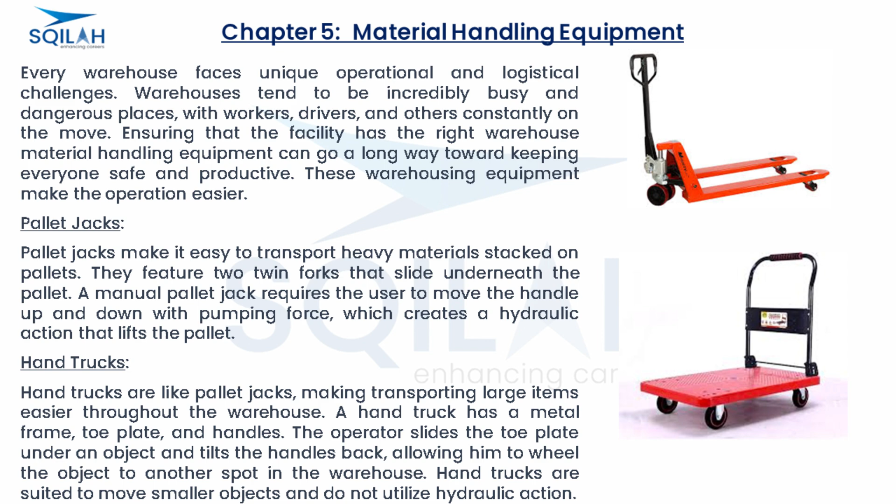Order picker forklift. An order picker forklift helps operators pick and transport materials needed to complete an order. The forklift lifts the operator to the same level as the inventory. This makes order picking more efficient and safer than using manual equipment like a ladder.

Side loader forklift. A side loader is a forklift designed for use in tight spaces, such as narrow aisles. However, it tends to be less maneuverable than standard forklifts. Depending on its design, the operator sits or stands in the machine. Side loaders can operate inside or outside and run on either electric, diesel, or propane.

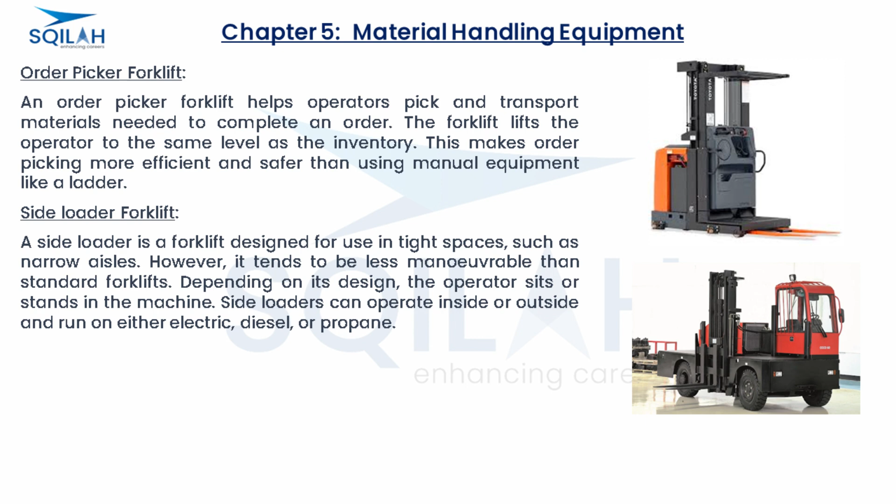Automated Guided Vehicles. An automated guided vehicle, AGV, is warehouse material handling equipment that travels autonomously throughout a warehouse. AGVs are used for tasks typically requiring a forklift, conveyor system, or even a manual cart. There are many different types of AGVs. They include automated guided carts, AGCs.

The most basic type of AGVs have minimal features and are used to transport a variety of materials in cross-docking, sorting, and storage applications. Forklift AGVs perform the same functions as a human-operated forklift but do not require an operator. Towing AGVs, also known as tugger automated guided vehicles, are used to pull one or more load-carrying vehicles behind them like a train. Towing AGVs are generally used to transport heavy loads over longer distances.

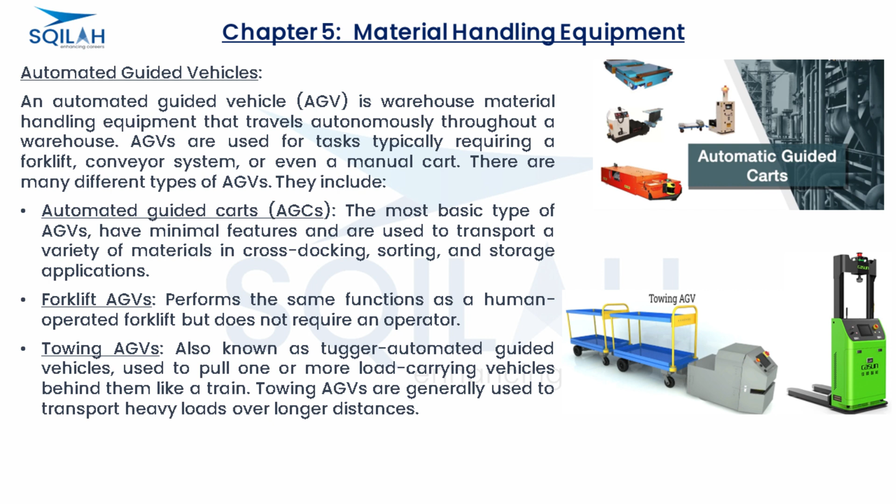Unit load handlers, typically used to transport single objects or units such as a pallet. Heavy burden carriers, used in applications such as large assembly and plate transport. Some feature self-loading capabilities. Autonomous mobile robots, AMRs. AMRs are generally the most advanced AGVs. They are frequently equipped with intelligent navigation capabilities, allowing them to dynamically navigate a warehouse and obstacles.

Cranes. Cranes are also commonly used warehouse material handling equipment. Warehouses may use a variety of cranes depending on their needs. Some commonly used cranes include stacker bridge cranes, gantry cranes, and jib cranes. Bridge cranes are used to move large and heavy objects. The crane spans a gap between two runway tracks and the hoist travels along the bridge. Gantry cranes are more flexible than bridge cranes since they are supported by their own frames and are usually mounted on wheels or a track system.

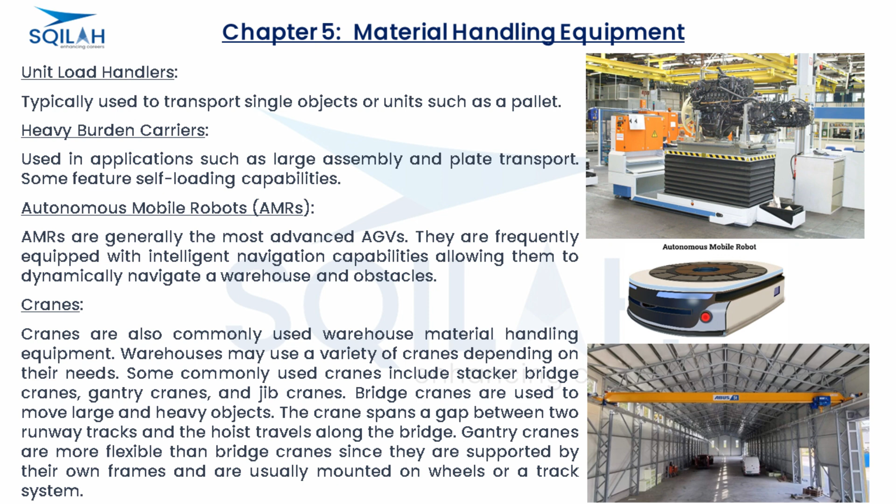Platform trucks. A platform truck is simply a flat sheet of metal with wheels on the bottom and a handle on one end to allow the operator to push or pull the truck. Some types of platform trucks can hold more than 2,500 pounds.

Conveyor belts. A conveyor belt is a motor-driven belt that is part of a larger conveyor system. Operators place items onto the belt. The belt rotates, moving items to their end location in the conveyor system. Reclaimers. A reclaimer is also part of a conveyor system. It is a machine with a rotating scoop positioned at one end of the conveyor system. The reclaimer gathers small, loose items and returns them to the belt to continue their journey.

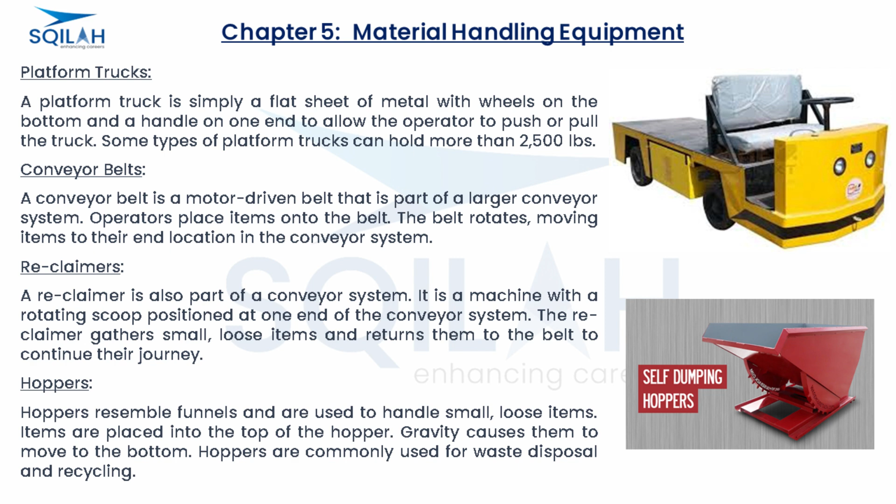Hoppers. Hoppers resemble funnels and are used to handle small, loose items. Items are placed into the top of the hopper. Gravity causes them to move to the bottom. Hoppers are commonly used for waste disposal and recycling. Bucket elevators. Bucket elevators, or grain legs, are used to transport small items vertically. Small buckets attached to a belt scoop up material and transport them to the top, almost like a small ski lift.

Silos. In agricultural settings, silos are used to store grain and silage and protect them from the elements. In other settings, they are used to store materials such as coal, wood, or food products. Silos help protect these valuable resources from the elements.

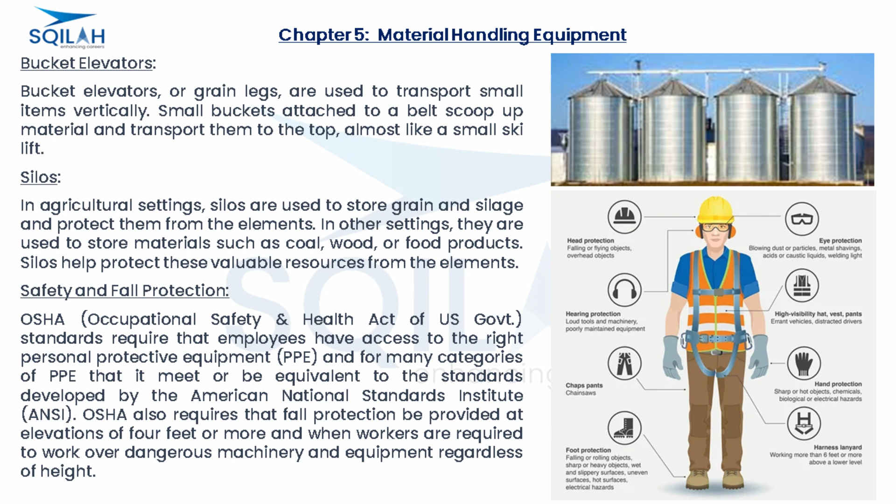Safety and fall protection. OSHA, Occupational Safety and Health Act of U.S. Government, standards require that employees have access to the right personal protective equipment, PPE, and for many categories of PPE that it meet or be equivalent to the standards developed by the American National Standards Institute, ANSI. OSHA also requires that fall protection be provided at elevations of 4 feet or more and when workers are required to work over dangerous machinery and equipment regardless of height.

Personal protective equipment, PPE. Warehouse settings can be incredibly dangerous. Trucks and people are constantly coming and going, workers utilize a broad range of equipment, and elements such as heat, electricity, and chemicals can cause serious injuries. The right PPE helps protect workers and reduce the risk of serious injuries. PPE is a broad category but can include items such as hard hats, masks, gloves, and protective clothing.

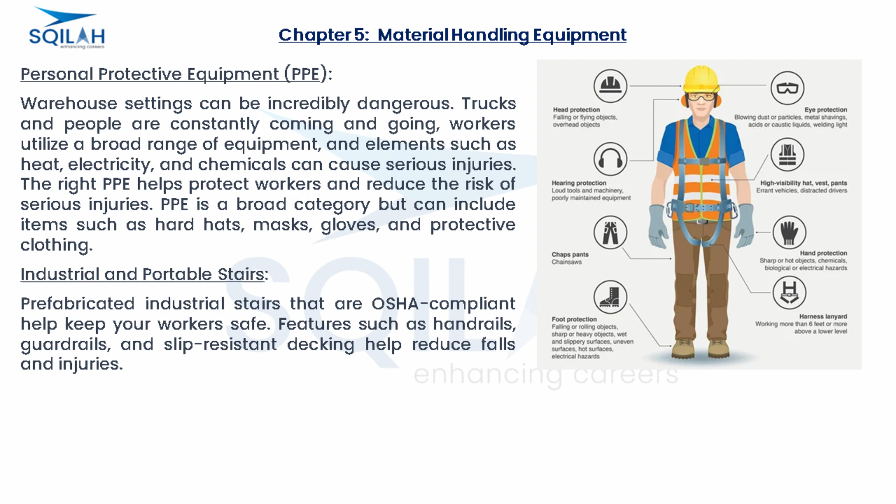Industrial and portable stairs. Prefabricated industrial stairs that are OSHA compliant help keep your workers safe. Features such as handrails, guardrails, and slip-resistant decking help reduce falls and injuries. Handrails. A portable aluminum safety railing system can protect employees from falls while working at heights. Railings should meet the latest OSHA requirements of 42 inches in height and feature non-penetrating railings that are simple to install and uninstall.

Safety swing gates. Floor openings or platforms, like stairway floor openings with passages through the railing, must either provide a swinging gate or offset so that workers cannot walk directly into the opening. An adjustable swing gate allows you to protect every passway in the facility with one SKU.